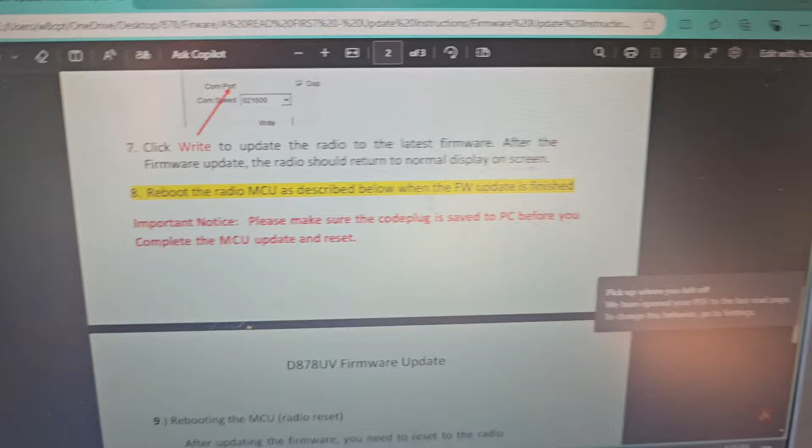I am not sure what this base band update is. I have not done that yet. But here's your firmware update instructions. Okay, you double click on that. It opens it up, and this tells you how to update the firmware. So I did that last night.

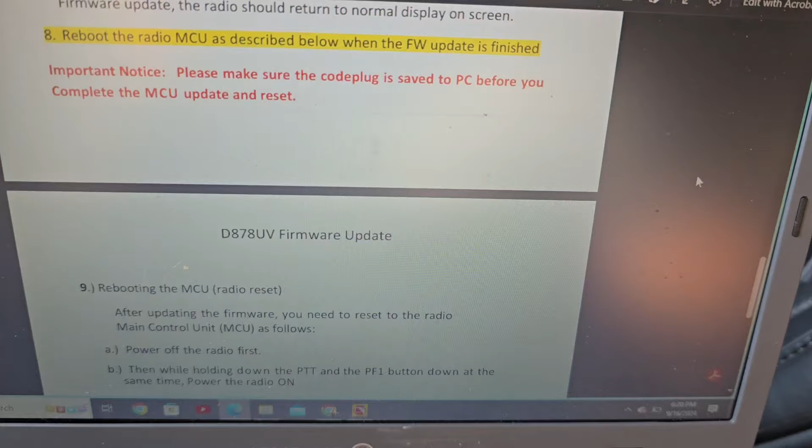So I'll show you really quick what it says. It walks you through how to do the firmware update. I'm not going to go through it all, but you got to put the radio in firmware update mode. And then it tells you how to get to the firmware and update the file. And then the last part of it was, once you get the firmware updated, they tell you to make sure

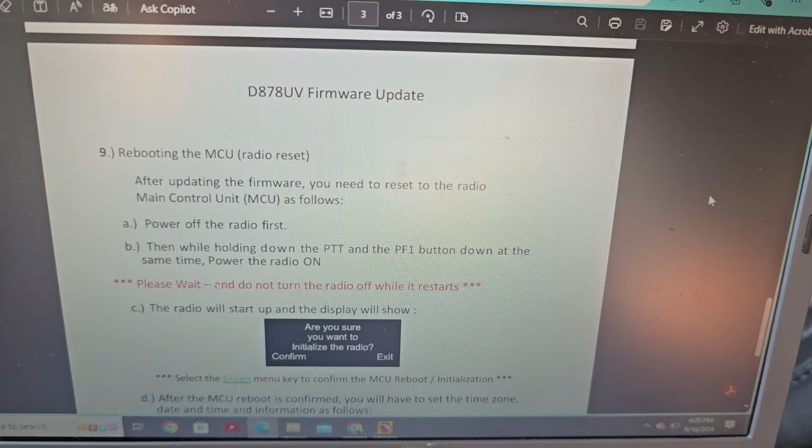you have a copy of your code plug. I would do this before you even start updating the firmware, before you even read this stuff. Make a copy of your code plug, and then after you do the firmware update, make another copy of it and name it something different, just in case it's different with the new firmware.

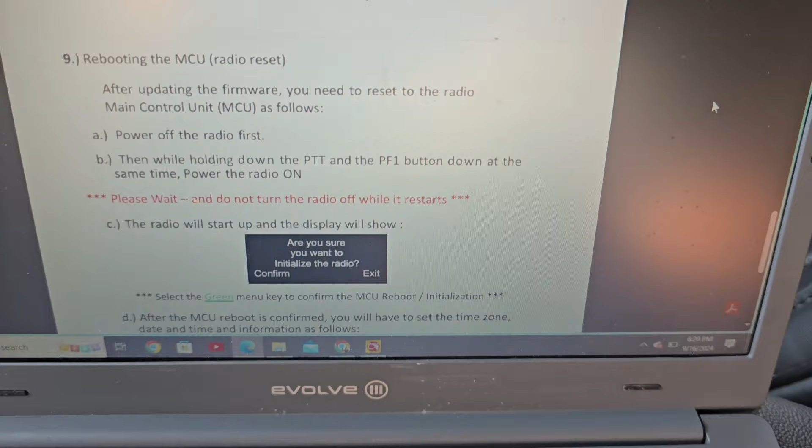And then you've got to do this. You've got to power off the radio. You got to hold down different buttons, so you'll see that screen, and hit confirm. And then that's going to reset your radio, and you'll have to redo the date and the time and everything like that.

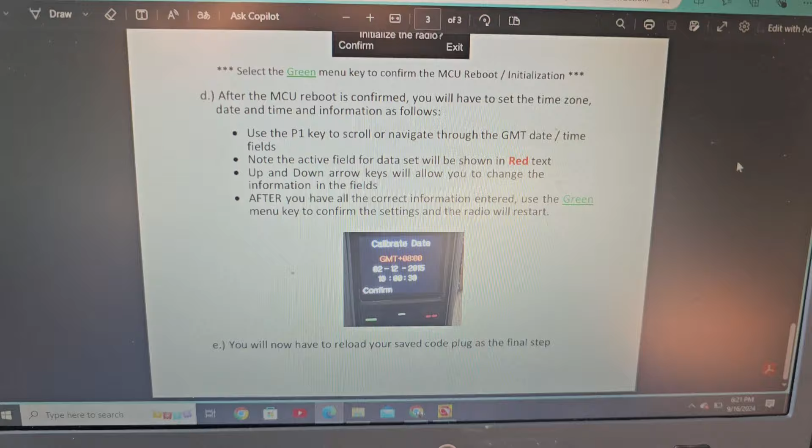Excuse me, I came down with something, so I'm going to be coughing off and on.

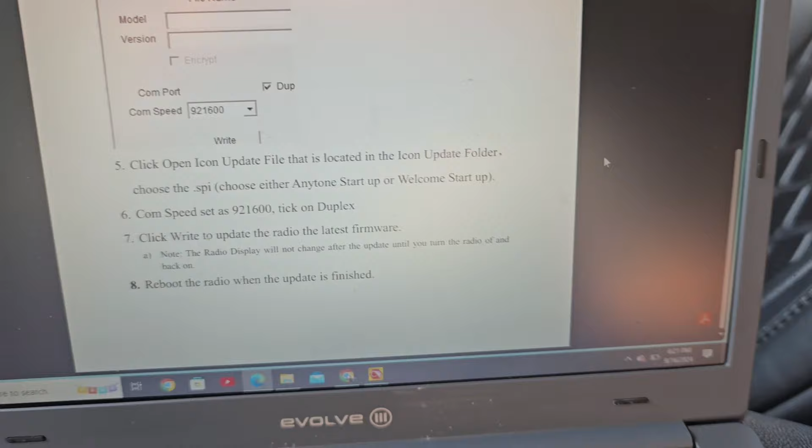So once you get that done, you're going to be at the point where I was last night with the other video, okay? The only thing that wasn't done was this icon update instructions. So I'm going to click on that, and you have to do that so it updates your icons. I already went through it just now, so of course it opens up at the end of it, but you hit the PTT key and the second button down, bottom side, on the side there.

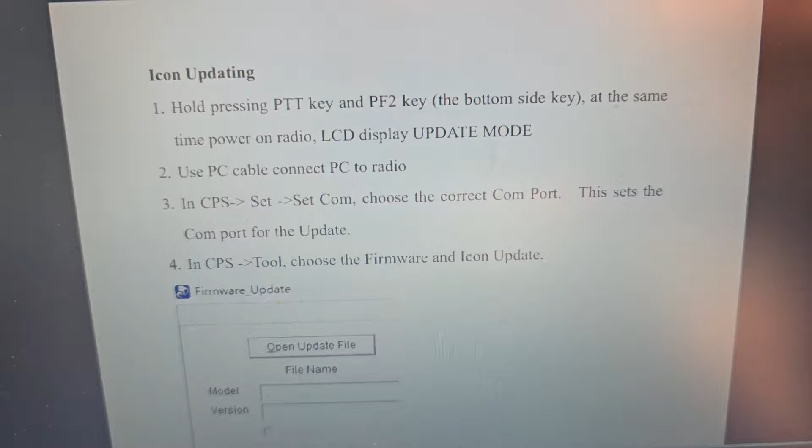So let me show you real quick. I mean, I think it's pretty explanatory, but you're going to hold down the PTT and the PF2 button, and that's going to put you in update mode. And then you go through these instructions. You go to the CPS for software and follow what this says, and that'll update your icons.

And then your icons will be proper. So then let's go back to the file, and it also has this JSON to CSV file conversion instructions. I haven't looked at that. This virtual driver instructions, that may be something you want to do first off to make sure you have the right driver on your computer so it reads your radio. So obviously I am not a pro at all this, but I'm telling you what I went through doing this.

So what I want to see now is, I figured out on my own how to update the keps, but let's see if this user manual actually tells you how to update the keps. I'm not sure if they updated the user manual. So just to find out, I'm going to do a search for satellite and see what comes up.

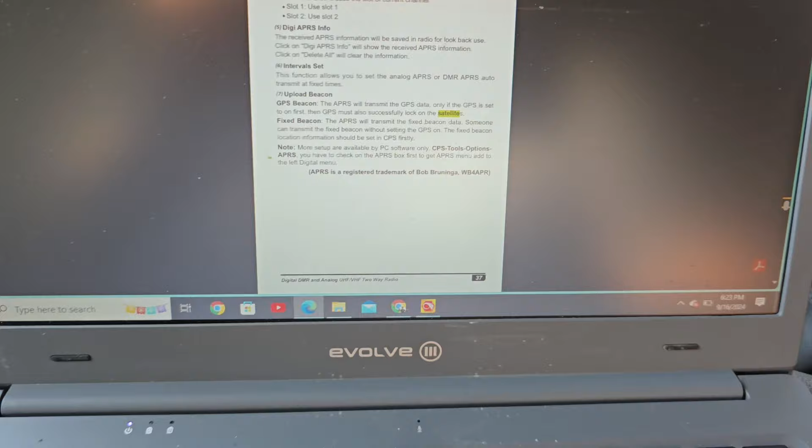GPS info. If GPS is not positioning, it will not display, no fixed position. And it'll connect to the satellites. Okay, so it's only showing 2 in these instructions. And it's talking about GPS satellites. So with that, I'm not sure if they have any instructions in here that show you how to update the keps. So I'm going to show you how I figured it out.

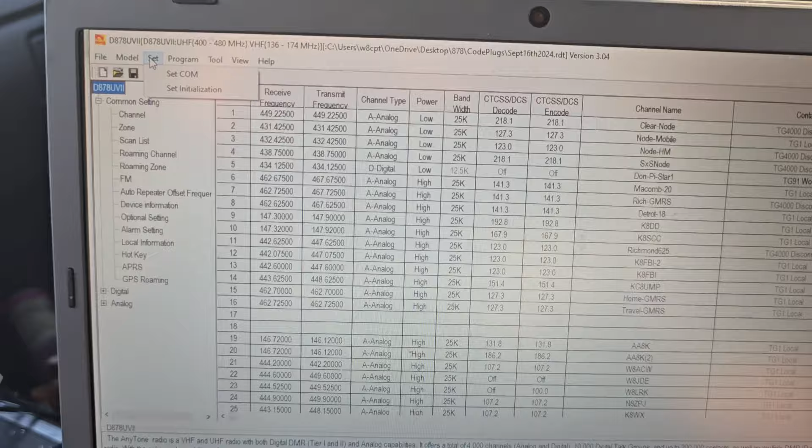So you're going to want to make sure you got your COM port set up here in the top left corner, which mine was set. I'm not going to update it again, I just did it. But make sure you got the right COM port set. Then you go over here to Tools. And all the way at the bottom here, you see Satellite Data Write.

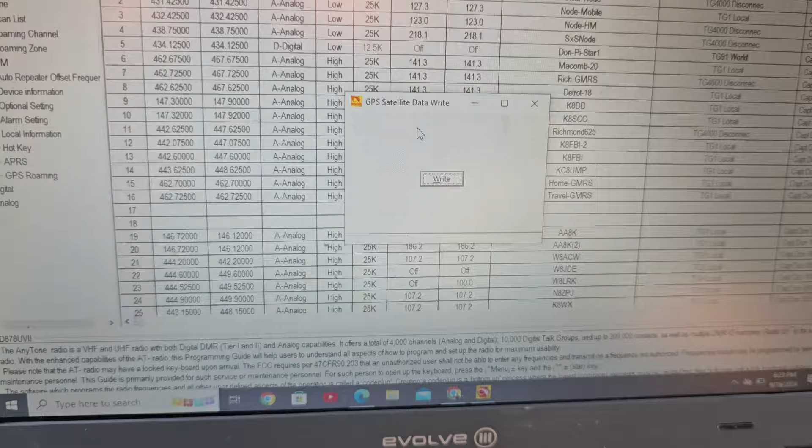With your HT connected and your right COM port, you're just going to want to hit write. And it's going to write, if you're connected to the internet, it's going to write the current keps to your radio.

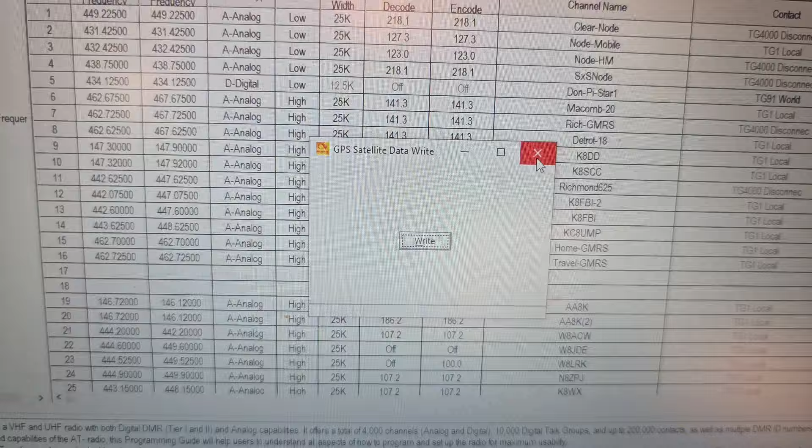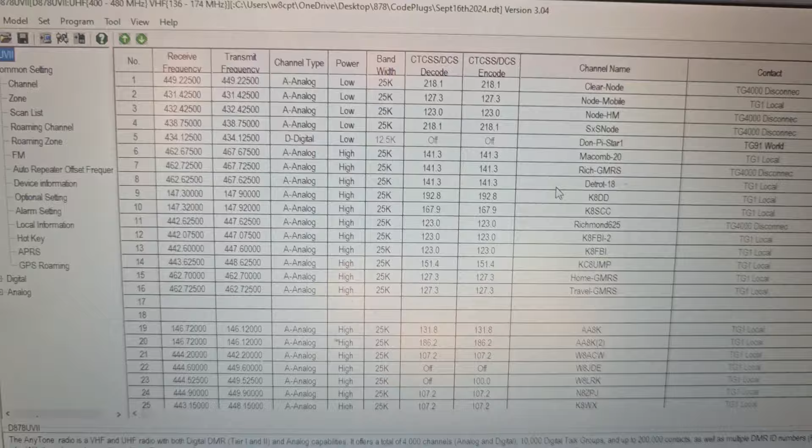Until I did that, I didn't have the proper keps, so it was off by like an hour.

So that I would recommend doing at least once every 3 days. I always update the keps on my OpenGD 77 firmware every day before I work satellites, just to be safe.

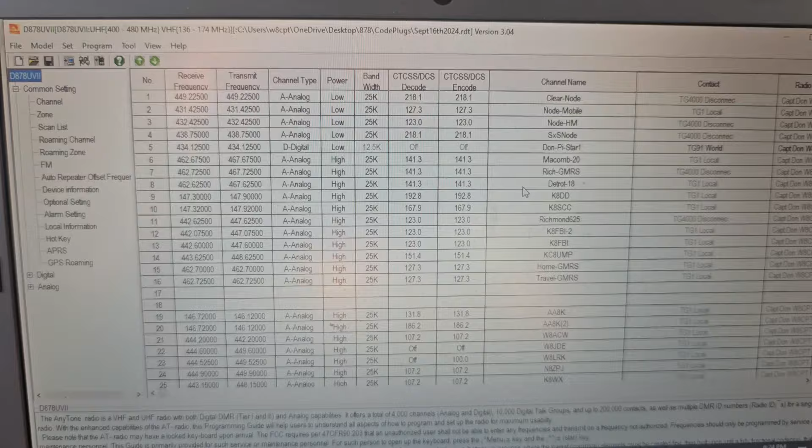You can get by for a couple days, I think, and be okay. But I always compare what the radio says to what my ISS Detector Pro app says on my phone, to make sure that the radio is synced with the proper keps.

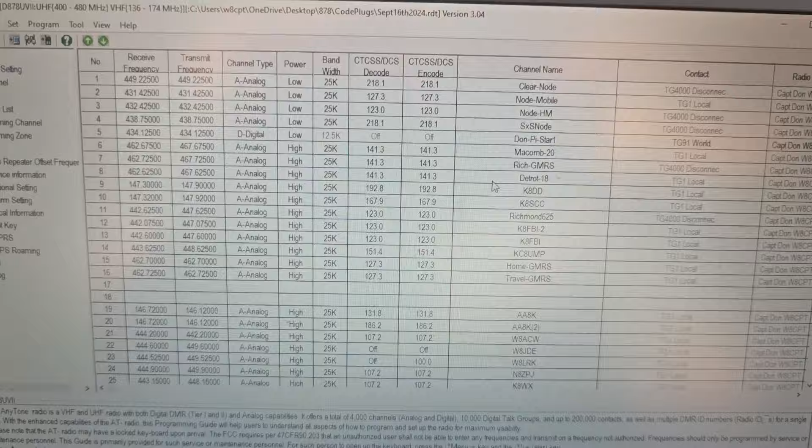So I will show you the radio now with the new icons. Give me a second here and I'll move over to the radio. Alright, we are back at the Anytone radio. The sun is really crazy right now.

Here, I'll just hold it like this. Alright, so I'm going to hit the menu button, and I'm going to scroll down to the satellite. And now you see it has a picture of a satellite instead of a speaker.

And now I'm going to go down to the satellites, and it's doing predicting. And it has a little satellite symbol there instead of a speaker. Before it had a speaker.

So it's predicting the satellites after I did that satellite write update. It says the next satellite is PO101 in 29 minutes. Now to open up that squelch, I use this middle knob and it opened up the squelch.

You're going to want the squelch open when you're working satellites. So now it says it's 29 minutes away. I cannot actually double check that with my ISS Detector Pro app.

I mean, I guess maybe I can. Let me pause this and try to do a screen recording. I don't know if I could do both at the same time, but hey, let's try it. Give me a second.